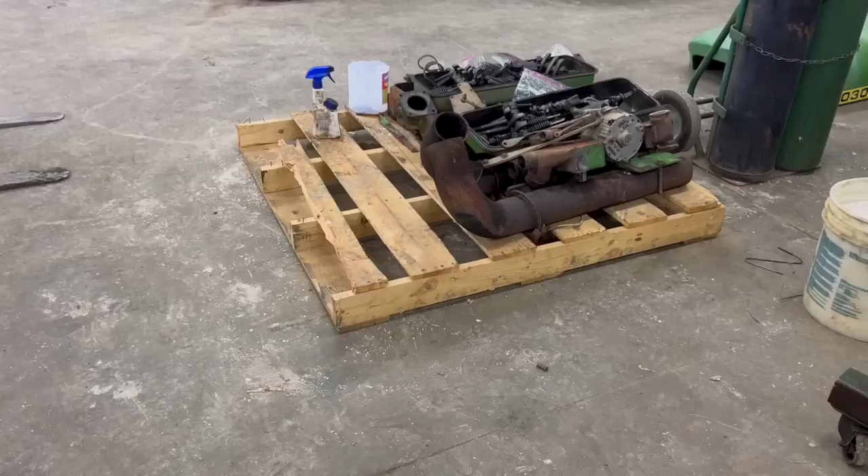It dawned on me that I drove out the driveway without kind of explaining where I was going today, which isn't a big deal, but it ties into our 5020 Detroit project. That's actually plugging away really, really well, but I also got to explain kind of what we're doing.

My friend, mechanic Larry, stopped in the other day as we were dismantling it because we had some questions on the clutch. Larry was here last summer when we rolled this project in the yard, and we all were really excited and also a little intimidated by it because it was definitely outside of our comfort zone. You literally can see the sidewall of the cylinder coming apart because of the steel delaminating. Mm-hmm.

Oh boy. Yeah. And Larry was here last week when we got everything dismantled and we got the clutch out and we were inspecting that and getting a game plan for that. But the other thing we did when we pulled the motor out, we actually pulled the hydraulic pump out, and Larry took the hydraulic pump home, and Larry's gone through a bunch of these.

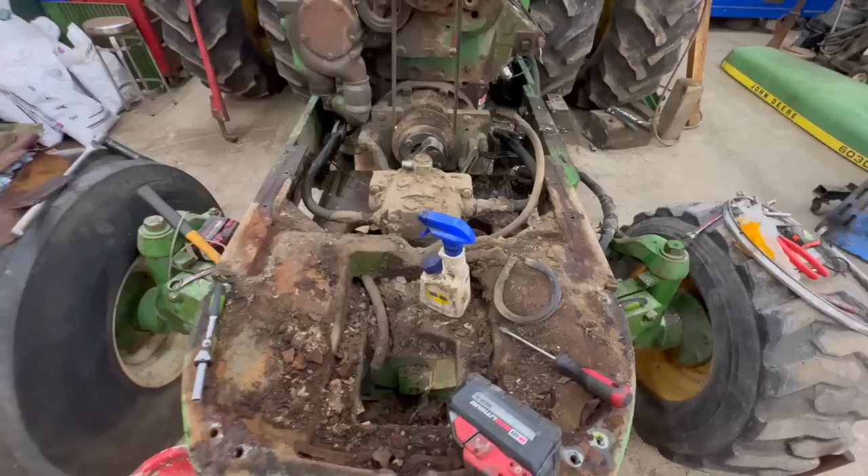And so at the tail end of last week, I actually drove over to Larry's house because I've always wanted to watch him go through one of these. I've pulled them apart, I've pulled them out of tractors, but I've never been the guy that actually puts them all back together. And my goal here was to film Larry dismantling the pump and then going back together. Well, last week we actually dismantled it.

All right, hydraulic pump is in the truck. Step one. You knew I was roping you into this project. There's no way we were doing this project without you.

Before we jump into this project, I want to just explain a few basic things. If you're a farmer and you don't pull on wrenches every day and you go talk to John Deere or a repair shop and you're like, hey, I got a manual. That's true. A lot of times what you have is the operations manual. The operation manual does the basics, tells you how to run the piece of equipment, some basic things like that. But what you don't have is what they call a tech manual. And a tech manual is going to give you the general idea of how to tear things apart and fix it and bolt it back together.

And typically, I don't know this for sure, but off the top of my head, I believe the 10, the 20, the 30, and the 40 series technical manuals was the only manual that you needed. But when you got to the 50 series and beyond, the 50 series, the 60 series, the 8000 series, then they had another manual too. You had your tech manual, but then you had the operations and tests. So the tech manual will still tell you how to put bolts in and out and what the procedure should be for that. But the operation and test is going to actually break down like what should your switches be at, etc. It's going to take it to the next step.

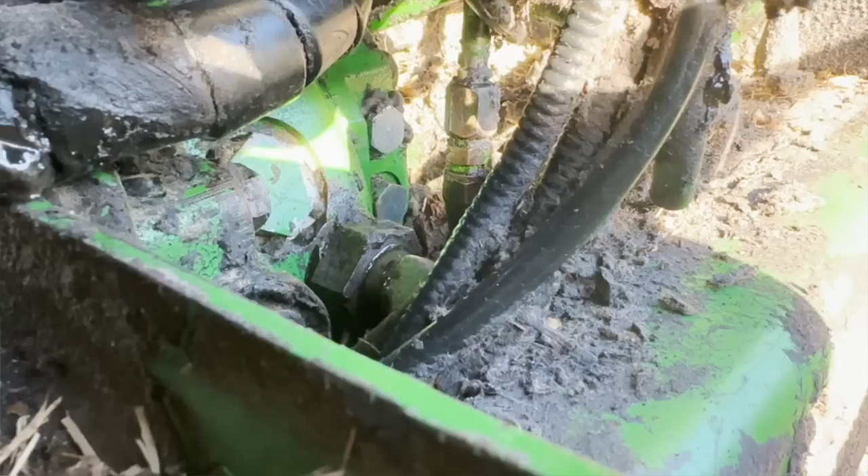Okay, so the last thing I want to talk about here real quick before we get into the video with Larry: how do you actually get access to these pumps? There's usually two different ways to get them. You either start by pulling the radiator and a whole bunch of lines and you lift them out the top, or depending on the application, you can drop them out the bottom.

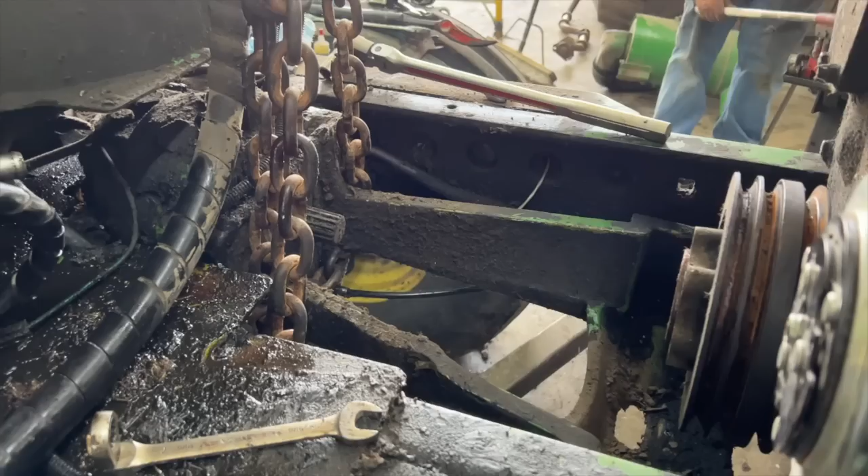Now, I've done both. I'll tell you right off the bat, your 20, 30, and 40 series, especially if it's two-wheel drive, it's not that bad just to drop them out the bottom. On the 50 series, you can do both. You can either pull them out the top or drop them out the bottom. On the 50 series two-wheel drive, it's not too bad. There's a light shield you got to pull off. Same with the 40 series, like a 4840.

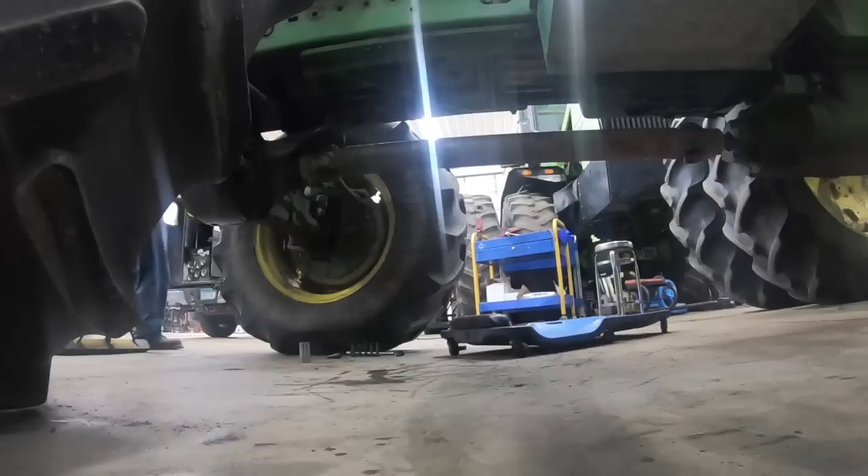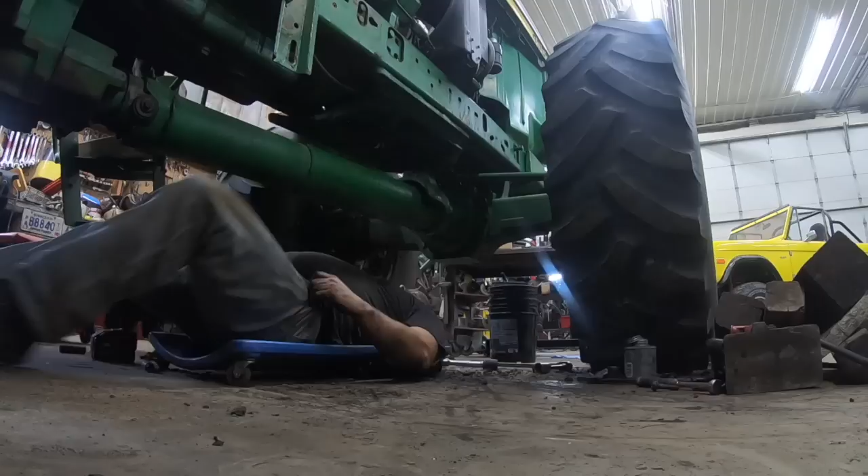On the 50 series front wheel assist, you actually have this big casting, and this big casting can be a little bit of a bear to pull off. Totally doable, but I'm going to tell you the easiest way. Usually if you get all the nuts and bolts off, you can let it rest there and then pull it down and let it rest on the drive shaft and then just transition it down to the ground. After you do that, it isn't too bad to pull the pump and the webbing out the bottom. You can do it. I've done it several times.

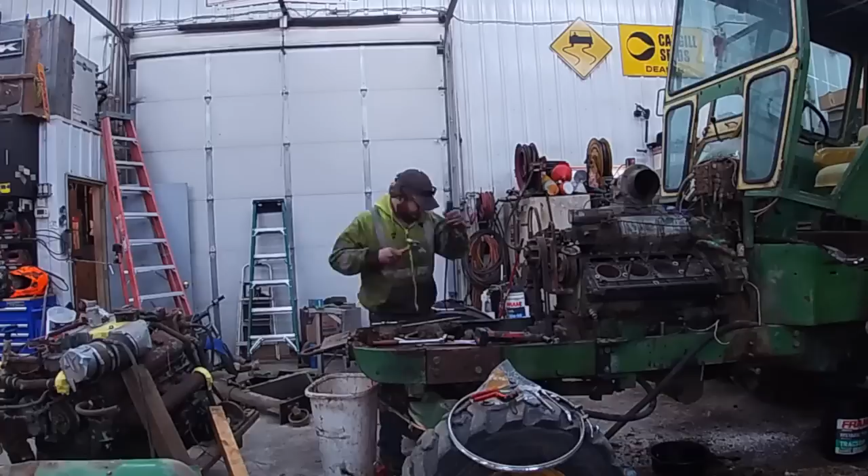I think the one time I had to do it, I actually jacked up the tractor just to give me a little more clearance between that and the front end because there's a little wear on the pins. But you kind of rotate it to like the 2 o'clock position and just drag it out. Careful, it's all heavy. That's the downside with pulling it out the bottom. If you go from the top, the trade-off is you got to get a whole bunch of lines and a whole bunch of things out of the way.

Okay, I've done both. If I have the time and I can put the piece of equipment in the shop and work on it, I kind of prefer pulling it out the top. Sometimes you just got to get low down and dirty because you're in a hurry, and you just pull it out the bottom and wing it. Sometimes doing that, you're actually going to need some specialty tools.

One of the toughest things, and this is why pulling it from the top is actually easier, if you're going to take it out the bottom is trying to get all the lines to crack loose. That's actually one of the toughest things. Get creative. Don't be afraid of building a few custom wrenches like these, because believe me, I've pulled these out in fields before, and some of these tools got built trying to stay ahead of a snowstorm. I was trying to get a 4955 back together in a cornfield in February as a snowstorm was rolling in. Hey, things you do, right?

All right, so I'm here with Mechanic Larry in his garage, of all places, but how many of these pumps do you think you've actually gone through? Oh, there's the look. Like, are you kidding me, Junior? This year? Okay, we're at the end of 2024. How many this year do you think you've gone through? Probably a dozen. Yeah. And if I've been doing this 25 years, that's a lot.

What's usually the ratio of good to bad? Is it like 1 in 10? Probably maybe 20% are not repairable, 80% usually repairable. Usually got a shaft seal leaking, and typically it's because the shaft is worn or the bearings are loose, and then the shaft is moving and it takes the front seal out.

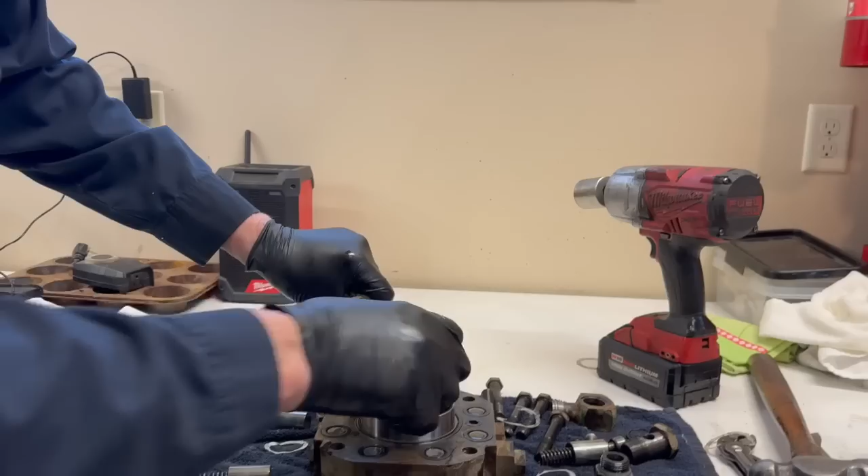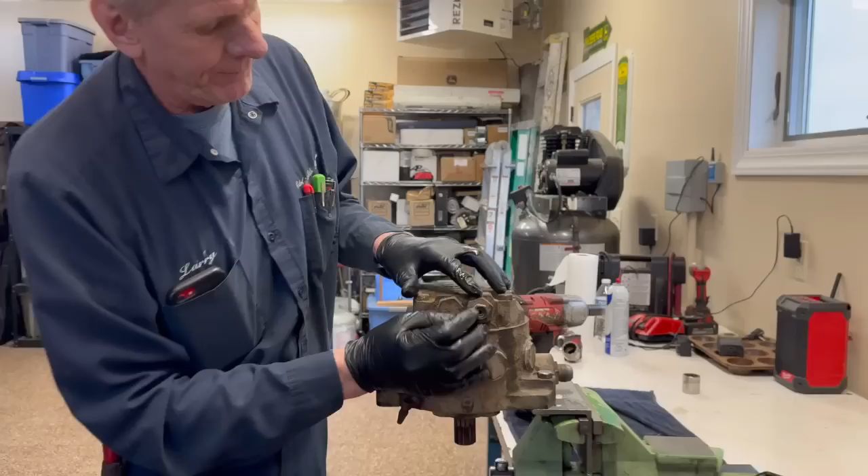This is called the head of the pump. Inside, this is where you adjust your pressure for the pump. This one has been threaded in quite a ways. Okay. Normally there's about 3 threads sticking out. If you look, there's an adjustment here; this is where you set your hydraulic pressure up and down. And typically there's 1 to 2, maybe 3 threads sticking out. This one has been threaded in quite a ways already, so we could have a pump that's got some wear.

But this is actually kind of cool because you have kind of a homemade bracket there, just a big piece of angle iron with 2 holes in it. Perfect. And it mounts up to the pump. John Deere's got a tool for it too, but this was a lot less expensive.

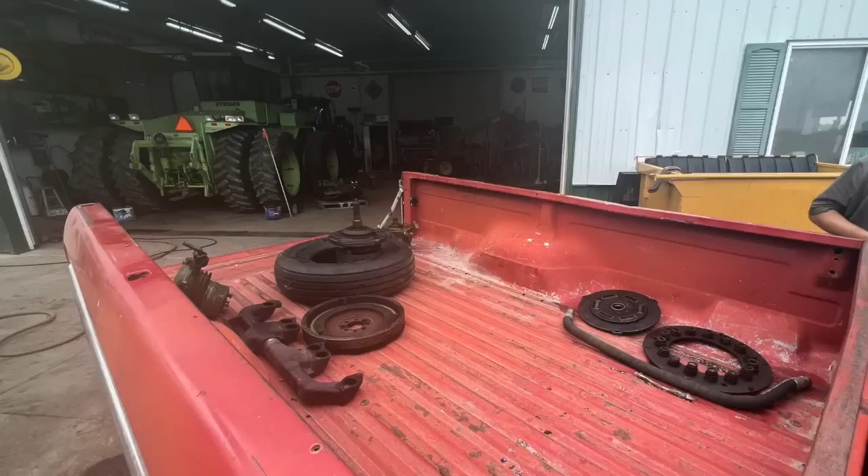All right, so right off the bat, you know the pump's been sitting for a decade plus. What do you think it's gonna look like inside? I think it's gonna look good because I'm looking at the oil as it's coming out. It's old and stinky, but it's not rusty. So okay, I think it'll be all right. So we'll pull her down and see how bad it is. You know I've been the guy over the years that's brought you several hydraulic pumps and you get into them and you're like, no.

New pump. Okay, so this is off a John Deere 20 series. A lot of the other stuff I brought you in the past was always 40 and 50, 55, 60 series, power shift stuff. If the tractor is not power shift, do the hydraulic pumps typically look like they're in a little better shape, or does any of that seem to matter? It doesn't really seem to matter. Okay. It depends how much debris has gone through the pump. Gotcha. That's what's gonna take these out.

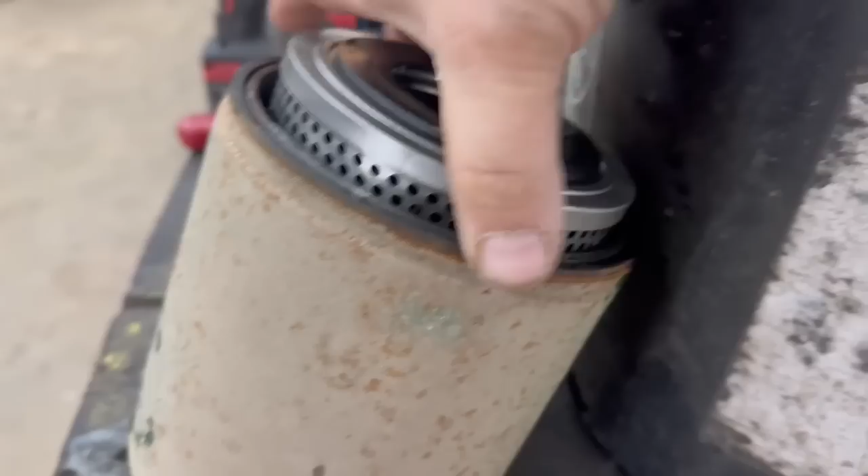One of the things that you want to do is, a lot of guys will mark 1, 2, 3, 4, 5, 6, 7, 8. I've got a system where I just lay everything out and I know which way I put them in. So 1, 2, I'll mark them here versus physically marking them on the pump body. This is called the head of the pump. This has got the stroke control valve screen on this side for the filter screen. Stroke control valve tells the pump when to turn on, when to turn off.

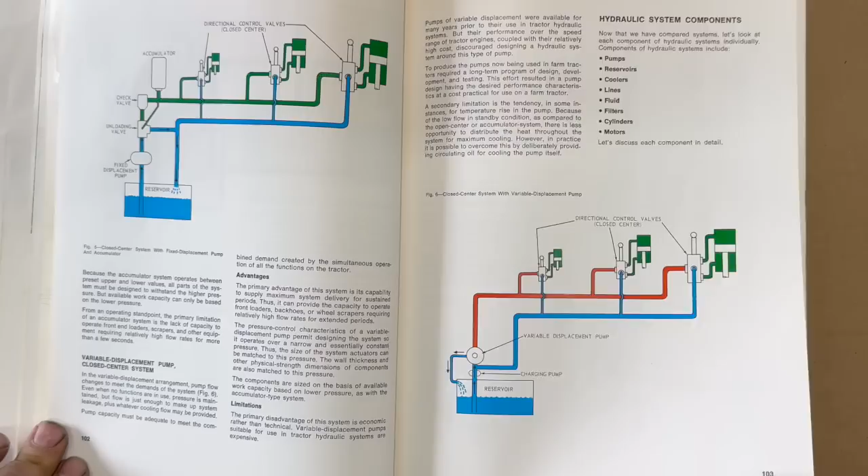When there's a demand for oil, it puts the pump into stroke. On this pump typically, as the shaft is turning, all 8 pistons are in the out position. When it's building 2,500 PSI or 2,300, all those pistons are out, so the pump shaft is just spinning. Once there's a demand for oil, the pressure drops, the pistons come back against the cam race here, and it starts to pump again. Right now, with no pressure, all 8 pistons, it's like a camshaft. It's moving each piston in and out.

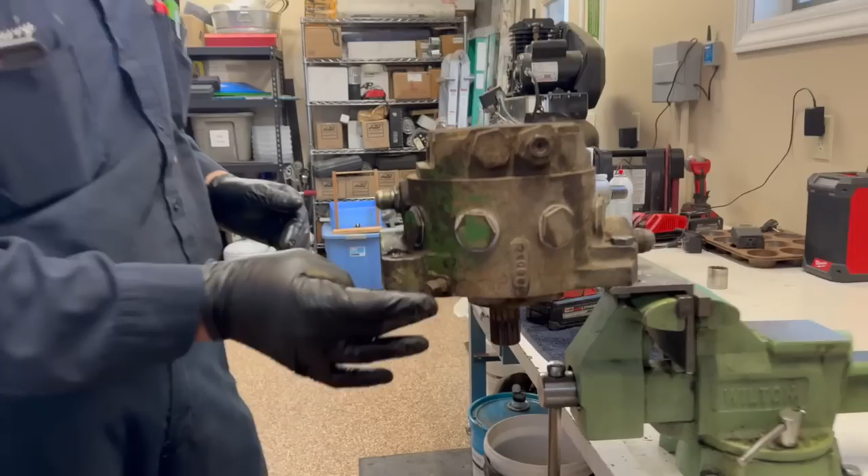Can I ask one more question? Uh-huh. Why did John Deere put that little line on the bottom of the pump? Seal drain line? What's it called? Seal drain line. I don't know why they put it at the bottom. You do have to replace that, obviously. Yeah, it was junk. I just know from many years of putting these in, that's the line everyone always has choice words over, isn't it? Yep. I don't know where else they could have put it. Okay. Now, the early 10 series didn't have this line on it. Gotcha. But you could add it.

And when you did that, you had to drill a hole into the head of the pump, into the nose of the pump. Okay. And then you would run a line right between here with a steel pipe, a piece of pipe fitting basically. And then you'd run one of these lines all the way to the back. So why they put it on the very top, or on the bottom, I don't know where else they put it, because that port goes all the way. Once we get it apart too, you'll be able to see that port, how it comes out of it. And most people don't put 10 of them on. No.

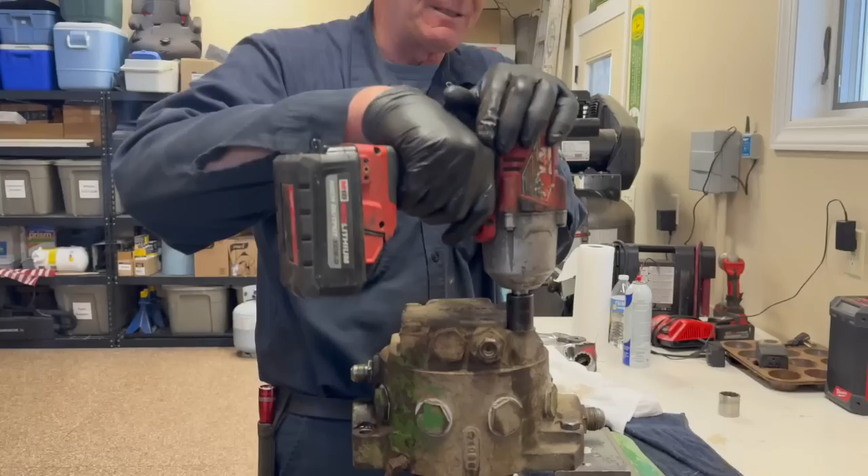So, we're ready to start. Coming apart is easy because there's no torquing. So the Milwaukee is, this is the easy part. Going back together, everything's got to get torqued, so you can't just zip them on. Okay.

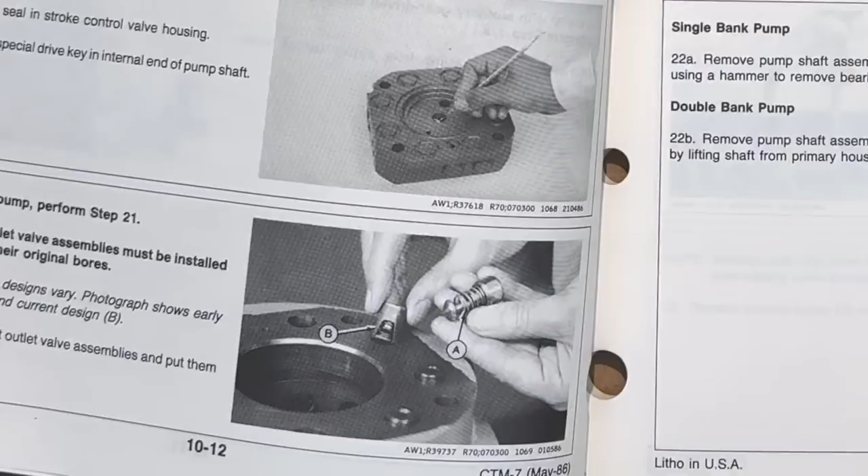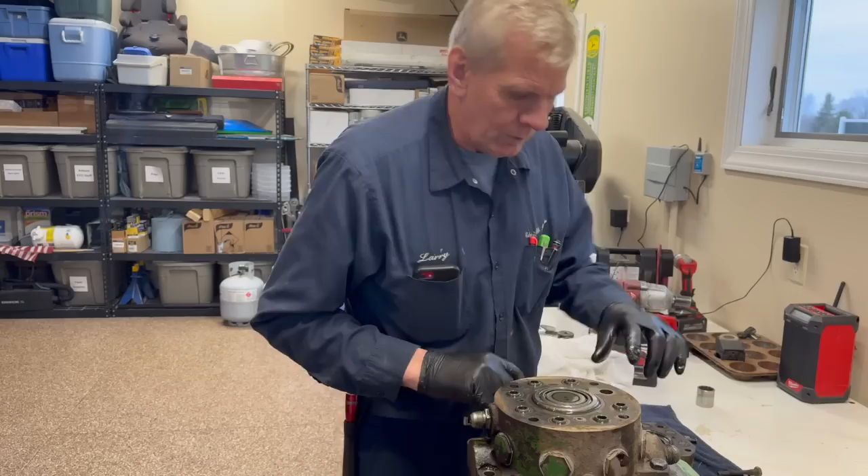To shim up the pump shaft. Now these, this is the early style. Later style this was all one piece. So these, when you put them back in, you have to peen them over a little bit. So this pump has probably not been apart before. What do you mean peen them over a little bit? You take a little ball peen hammer and you hold this down and then just tap it, just a little tap right here so it can't fall out of there.

Okay. Because these springs feel like they're loose, because normally when you take the head of the pump off, normally they come out and that's why you've got to peen them. This one, for some reason, they're not popping out all the way, which they normally do. Get all 8 of them, and there again, we're putting them all in order, so when it goes back together, it all goes back together in the same holes. And there's 8 of those? 8 of these, 1 for each piston, yep.

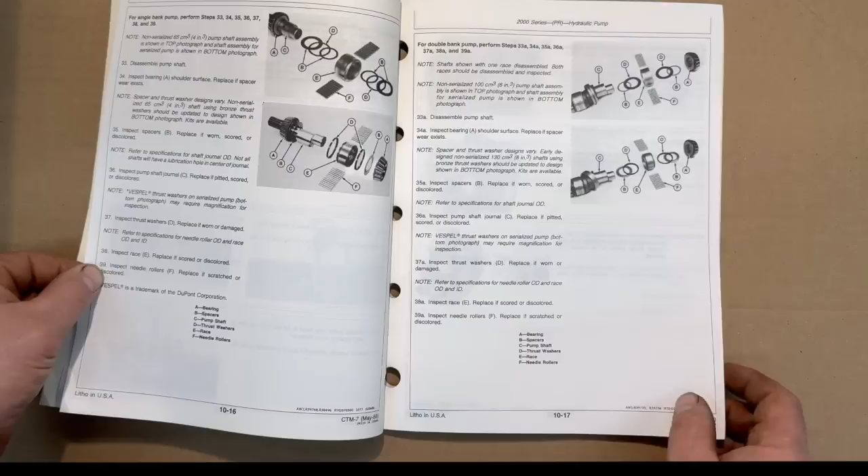So when you actually pull them out, there's a seat. It's like an engine valve seat. Okay. And then it goes into a seat inside the pump, down in there. Okay. And the spring locks it into place. Now we might be replacing these springs, Eric, because I recall every one of these, because the 10 series had the same pump, they'd pop out of there all the way.

So. Think that could be just from sitting? Shouldn't be. There's a spec in the book. I can check what the free length of these is supposed to be. I've got a feeling that's probably inexpensive. No, they're not going to do that.

Piston number 1. Watching the oil go in the pan, I was like, yes, I'm not responsible for dripping oil on your garage floor yet. About a year and a half ago, I think it was parts for Puff, I brought him here and didn't realize that he dripped a trail of oil from the middle of his driveway into his garage. Now, Larry's very mellow and very easy to get along with. That still doesn't mean he wants hydraulic oil dripped on his driveway. So we did our best to clean it up that night.

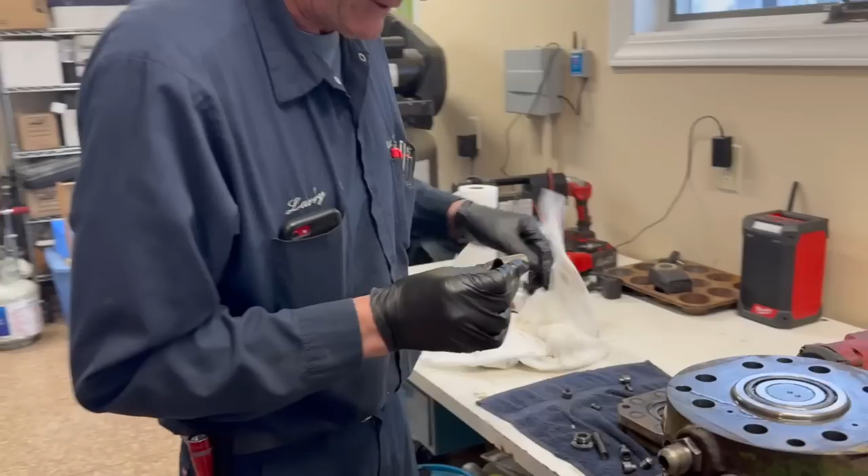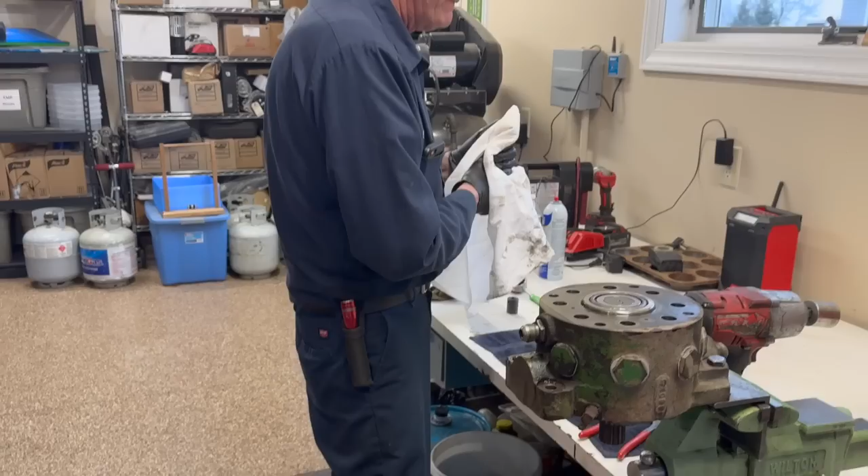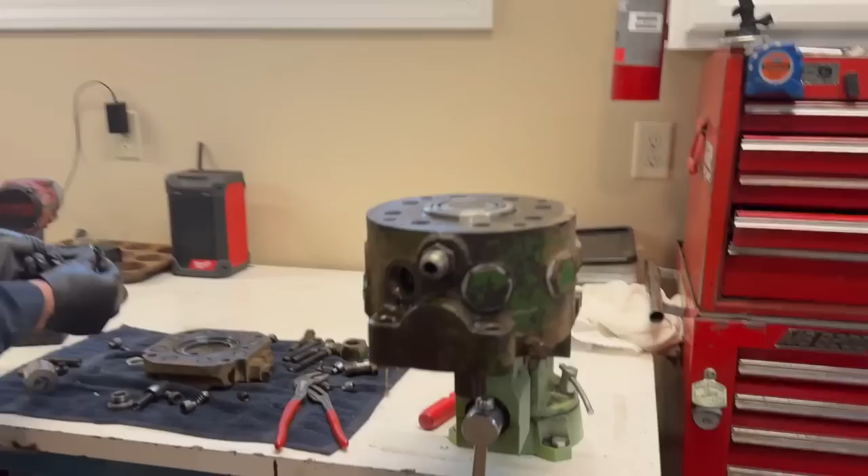Now this is, if you were to have wear on the pump, this is where it would be. You'd have scuffing and scoring. Okay, and that's actually looking pretty decent. Very nice. You don't have one laying around here that's smoked, do you? Just to show, when it's this bad, replace it. No, I don't have one of them around. Will it be pretty visible? Like you're not questioning if it's bad or not? No, there's no question once you see that. And that's these caps here? Yep. And if one is good, typically they're all good because they're all operating the same amount.

So now this is just repetition. You just gotta do it 8 times. Want some help? Well, it never goes smoothly when people are filming it. It doesn't. You just go right up against the head of the bolt and it stays there. Okay. So now, this is looking better than other stuff I brought you. So far so good.

And you're just tapping on the end of the shaft there? Yeah, and it's supposed to fall right out at this point.

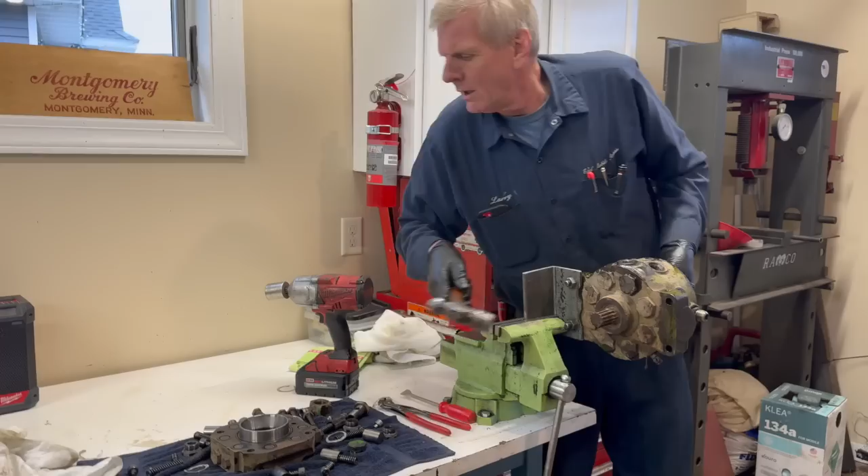All the pistons come out, don't they? You got 8 there?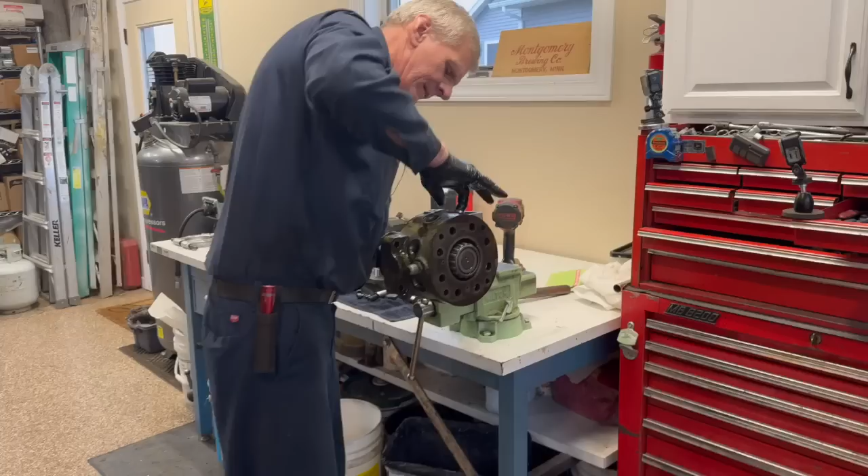Well, good to see you're not perfect either. Now it should fall right out of there.

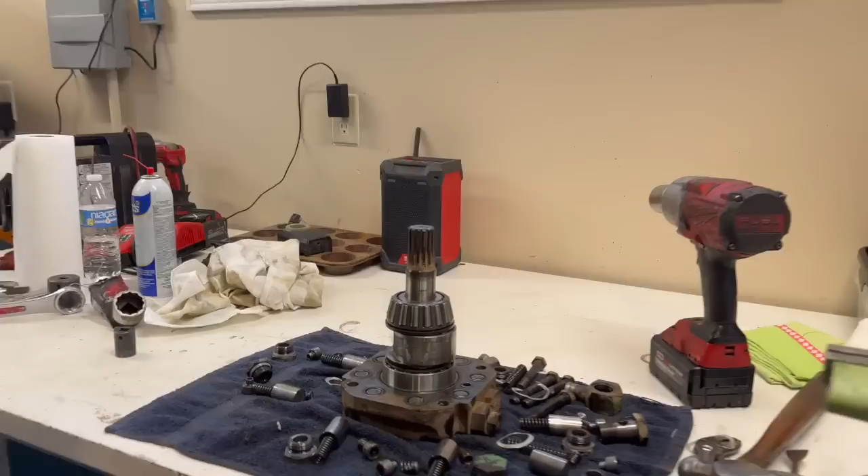So it's basically like a little camshaft. Just like a camshaft. So as that's spinning, this piston's going in and out in that inner cavity, and that's what's pushing oil. Yep, that's a pump seal, just like that.

So now you can see on here, we have a little bit - oh okay, that was this oil. Okay, a little bit of a wear pattern, but not like a lip. You can't really physically feel anything. Let's see what this O-ring here is.

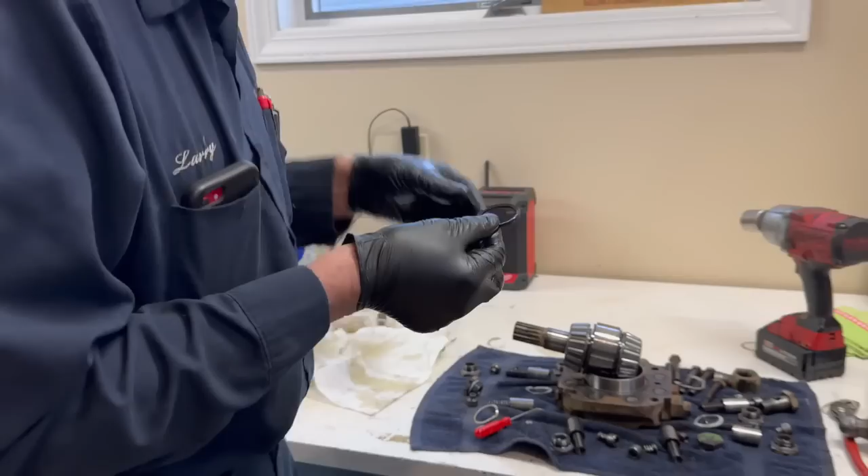This is the one that's always bad. So you had the plastic seal pack and then the O-ring? Yeah, it goes on like this, and if you look, this is the one that will leak in short order. So when you do have it leaking out the tractor, that's usually the one that's gone.

Because this seal is the outer seal here, this lip seal is mainly a dust seal. It's not the pressure seal - this one and this one are on the shaft like so, and they sit right there.

Now, the million dollar question: can you put those two in with it in the tractor? Absolutely not. Nope. So no matter what - and usually if those are bad, you probably got something else going on. I've had guys put just the outer seal in thinking that would work. No - it's getting so much, because once this packing is really worn, if you look at it, look at this side, what it looks like.

Now I'll give it 180 and see what that looks like. How it's got - it looks like the quad ring out of an SCV. Yep, it's a specific quad ring, and there's no quad ring left here. So it's worn out.

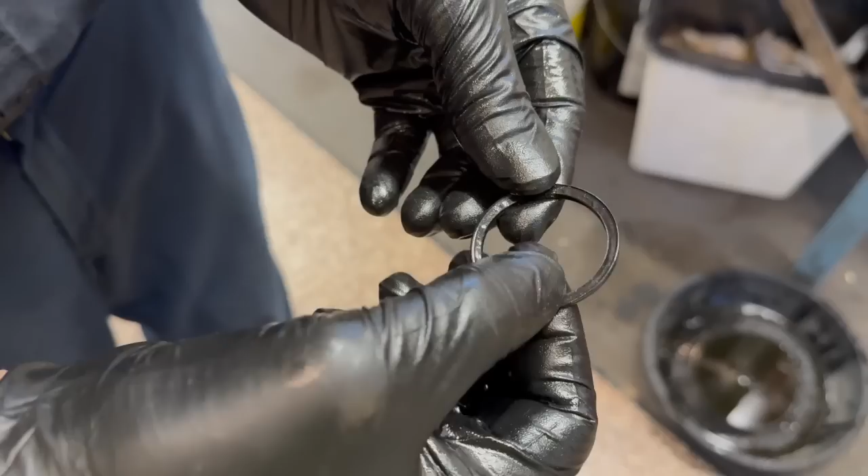Yeah, this is worn. Oh okay, I got you, so it's worn that much. Yeah, there's that - if you look at the thickness of the outside and the thickness of the inside, you know there's that much gone off of it.

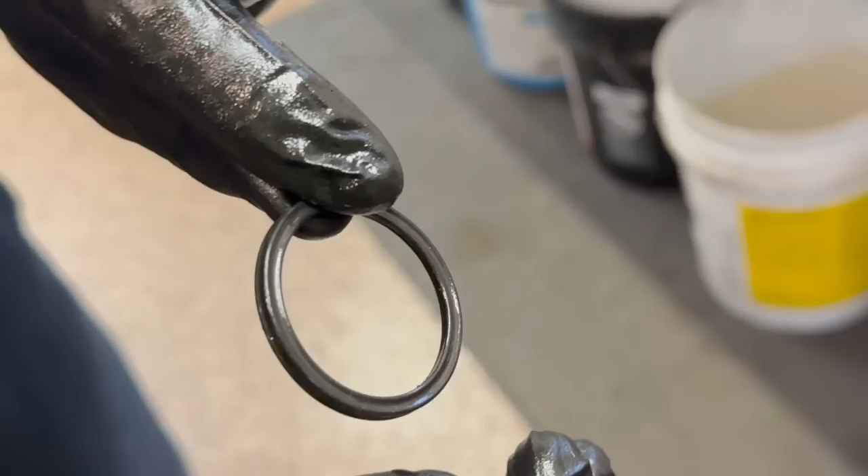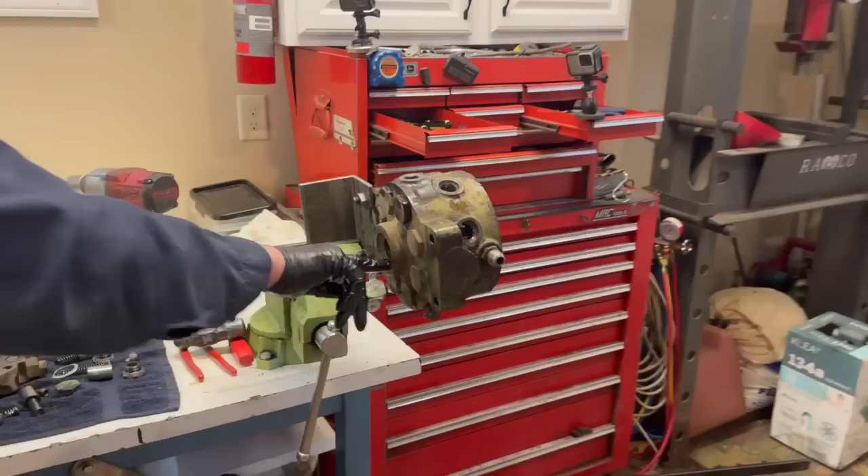No, you can kind of see it, but that's why you can't put them in the machine - you can't put it in. There's a lip seal in here yet, and that'll take out later. There's a snap ring that retains that in place.

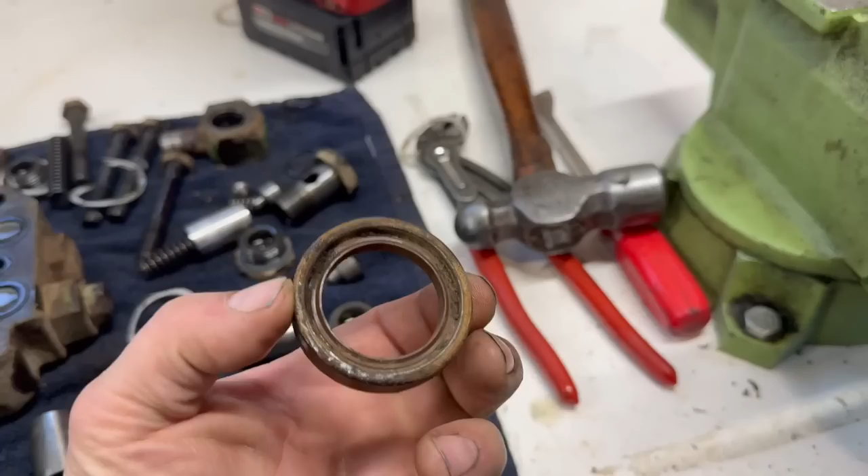And that's all there is for the pump. Get these out yet - behind that is your inlet valves.

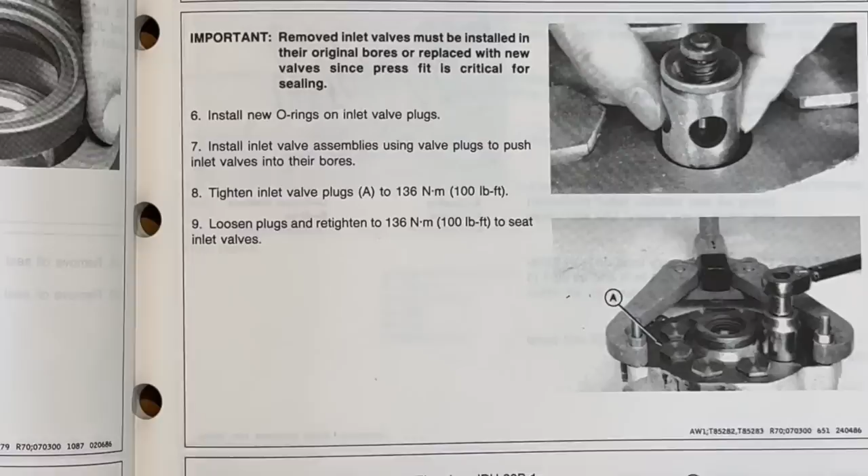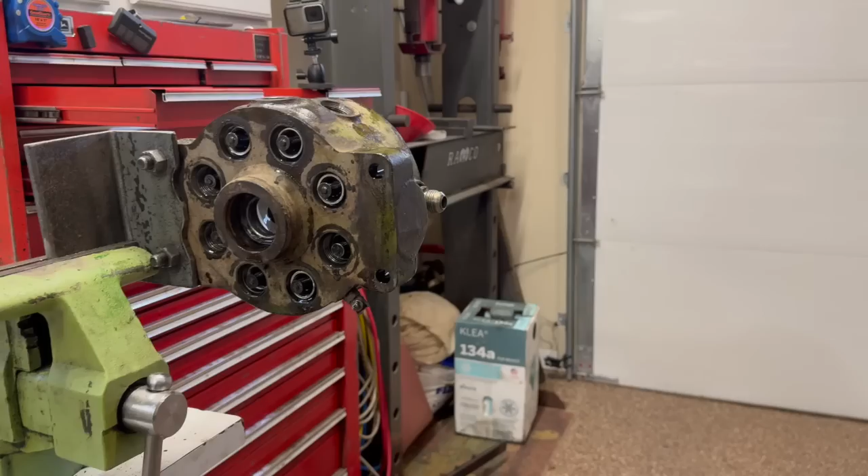You do have a little problem with these. Okay, I'll bite, what's the problem? Just a second, I'll show you in a second. Is this the type of problem that costs money? Yeah. Oh, I knew I wasn't getting out of this unscathed.

These are supposed to be pressed into the housing. And they're all loose? Very loose. So you're about to tell me she's junk, isn't she? When the housing's worn that bad, sometimes you can peen them with the center punch.

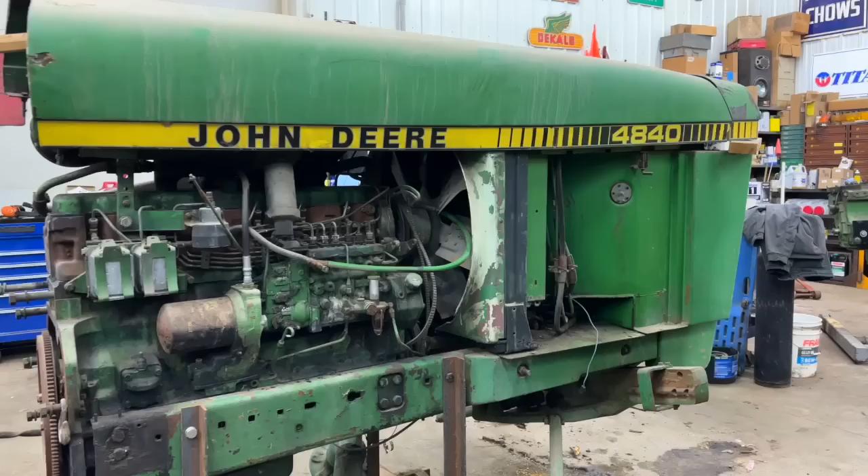These are gone too far. Oh wow, the bottom is actually eaten. They've been hammering in there.

It's just about eaten through. Yep, there's kind of that lip, and it's actually eaten into that lip. Oh man, you know how other people have that luck - like, oh, we just threw batteries in and it fires up. I don't think I have that luck.

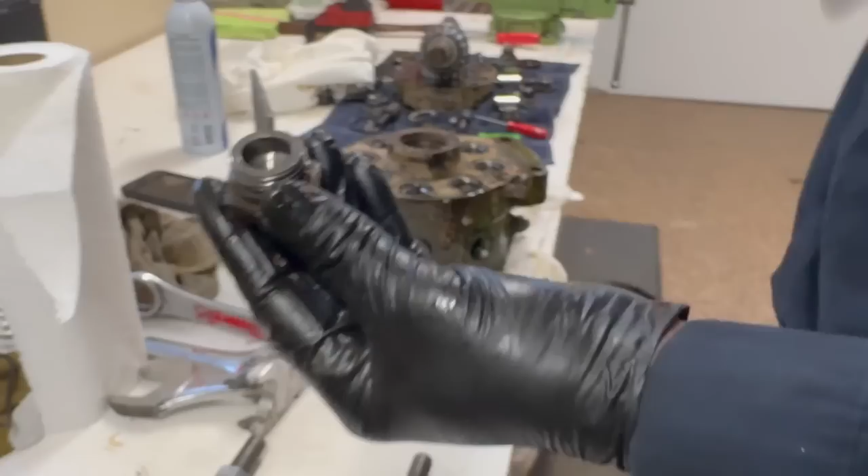Because typically when you thread this - oh yeah, you can see, look at the heads, they've been hammering against here, and that's what that little lip right there is. Those valves have been doing this in there. Because typically when you thread this down, that holds right up against that, but these have been bouncing so long that it's eaten into the housing there and it's eaten into here.

Well, can I give you some good news? That's not going to matter - there's hoses ran up to both ends, so we could make whatever, we can make anything work. All right, so it's just basically scrap iron?

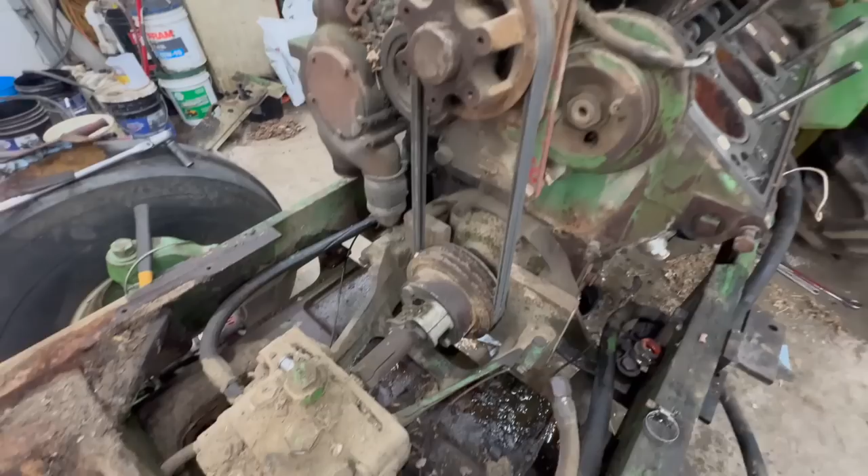Yeah, because there's no way I can get those to retain, and they're so deep. Even if I could get them to retain in there, they're going to just pop out. There's not enough material left to hold them from bouncing around in there.

Well, let me bring you what I got. We'll see if any of it's salvageable, see if we can make something work there. Shoot, because the shaft actually, that could have been cleaned up and reused.

I can't tell what these feel like. I can press this off and then we can see. The other reason I've had to replace shafts, behind this bearing race is 36 needle bearings. And if the shaft itself is worn, you got to replace the shaft.

I wouldn't replace the shaft because of this, but if that was worn, I would have to. So possibly we have a salvageable part. A part, yeah. How you know, we'll press that off. We just found the bad news, right? It's not salvageable. Okay.

Well, can't quit the day job. I don't know what the day job is anymore, but can't quit it. The downside of when you get into these projects is some days there's a joke about the checkbook not being deep enough. Yes. But we'll see what we got.

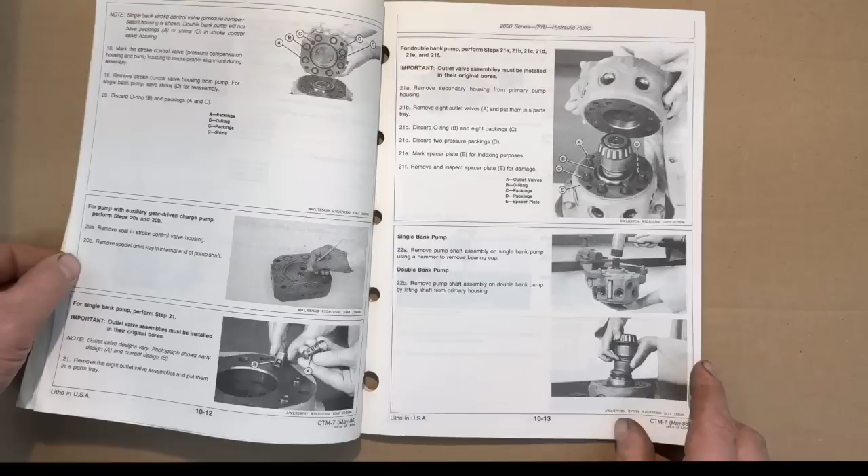The good news is, I don't need this to be practical. This is just a fixer-upper. This is a toy. This is gonna be a glorified car that if we can put in a field, we will call it an accomplishment. Call it a win? Yeah.

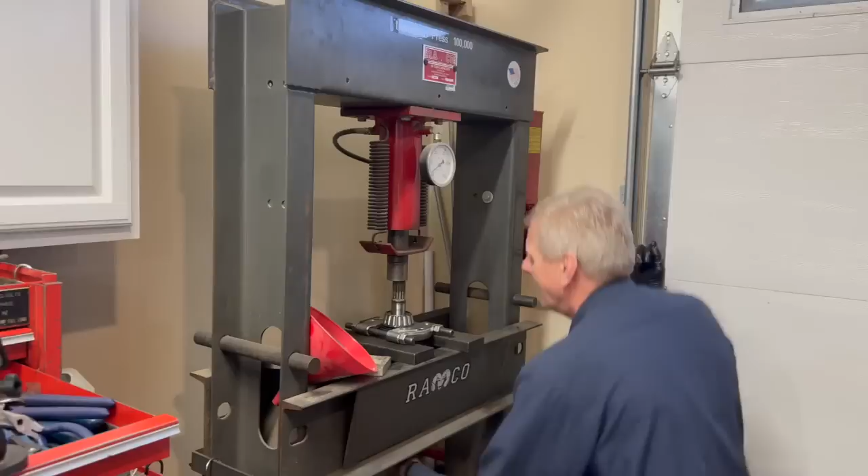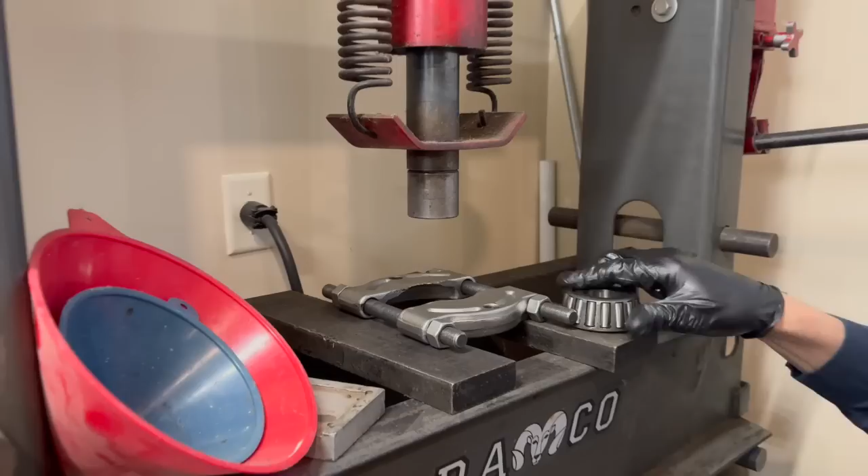Not everything comes apart like that, that's for sure. Okay, now we'll see what the... Push one pile out of the way.

Okay, so this is where the 36 needle bearings come into? Needle bearings, you see right there? Yep.

Go inside of that race, and typically this is where you'll have the wear, on the uphill when this is operating. This part of the shaft looks really good, really good.

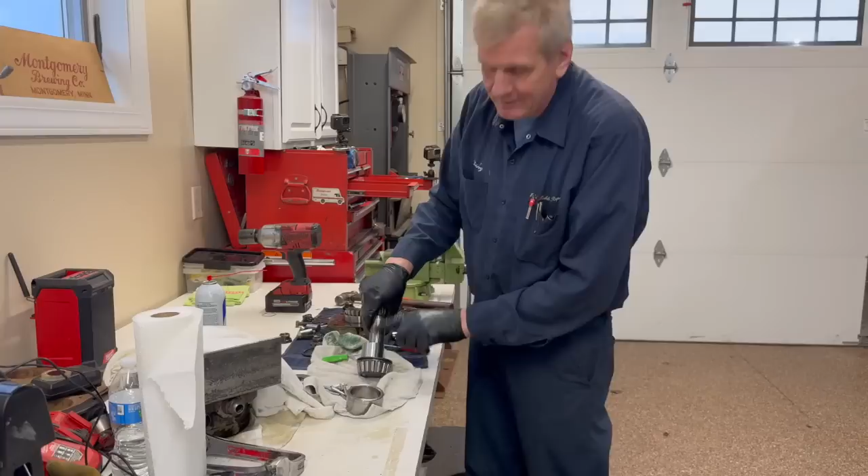So 20 series or 30 series, 4430s, 4630s, 40 series already went to the newer style. And what they do, just make things beefier? No, they actually changed, rather than having this and this against the race, they put a small thin washer and it's a different setup completely.

This is a little different because we only use 25 needle bearings. They're larger diameter needle bearings on a 40 and 50 series and newer. So this is different, these are different. The shaft is different. That stinks.

This I thought, well, main hydraulic pump, that's an easy one. I didn't expect those. Any idea what would have caused those to chatter like that? Just luck? Many hours of use, vibration, sure. Maybe, would this engine vibrate more than it will? Yeah, probably. I think that's pretty safe to say.

But even that, because this is, you know, I don't know if vibration could have done it. I think it's just use and years. And once they come loose, then every revolution they're doing this. Sure, they just heighten it. They're popping in and out there because it's trying to suck in oil every time.

I love talking to you, but these conversations get expensive sometimes. Oh, we'll figure it out, we always do. There's a reason I live in mom and dad's basement. You want me to pull the head apart while you're here too? Yeah, might as well, make it fun.

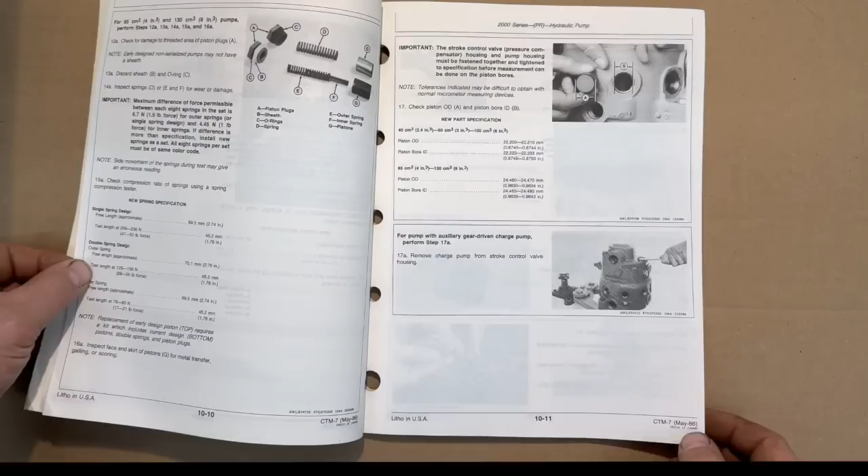You can actually see the stroke control valve from here. Okay, do you remember me talking about destroking screws?

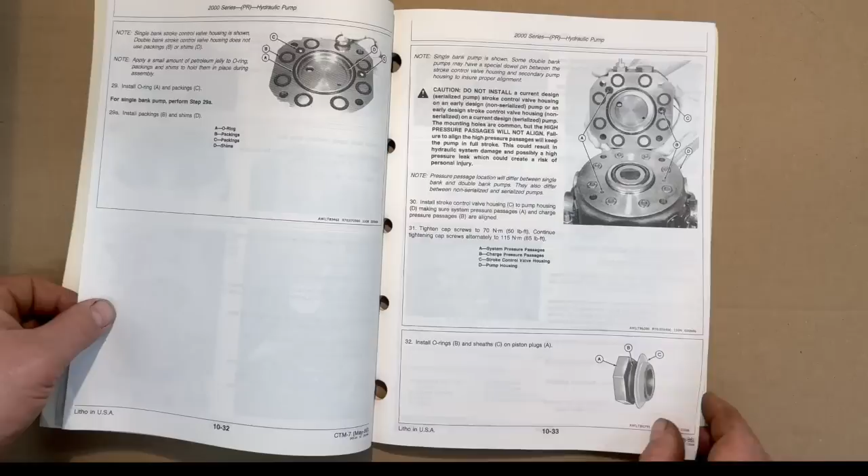That right there explains why that thing was turned in so much, doesn't it? Uh-huh, yes.

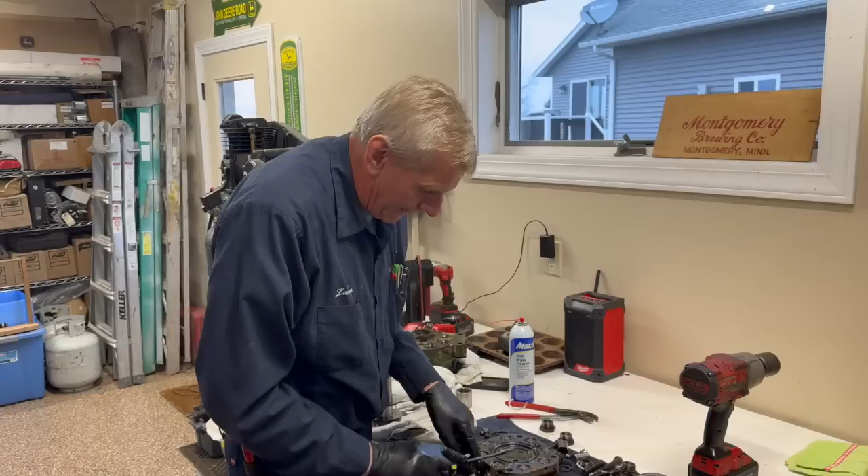Okay, in the hydraulic head of the pump here, you've got your stroke control valve right here below. And then there's a set screw that we looked at earlier, that's what sets your pressure. And as you push that set screw in further, it pushes this sleeve right here, it puts more pressure on the spring for that sleeve to push against the stroke control valve.

So I'm gonna take, and I can actually, oh sure, you can pry it up. But we got so much spring pressure against it because our pump was worn, I'm assuming. That's why there's so much spring pressure against it. So we'll pop that out of there.

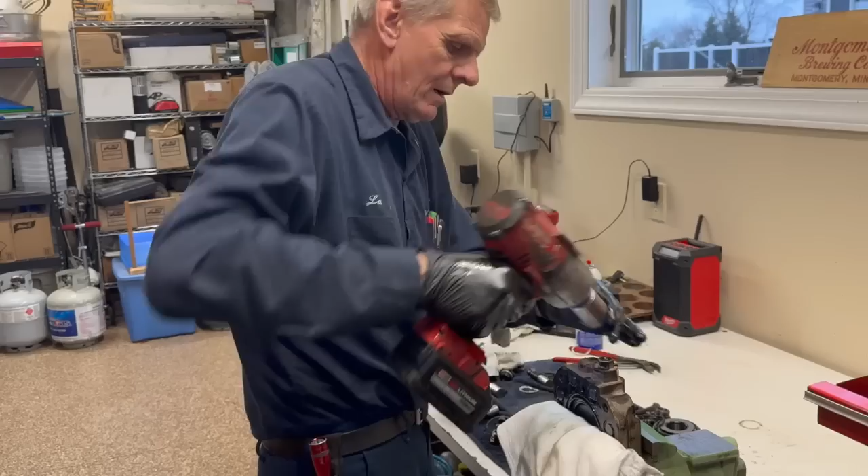This is the big spring that this adjusting screw pushes pressure against, put pressure against this spool to go against stroke control valve.

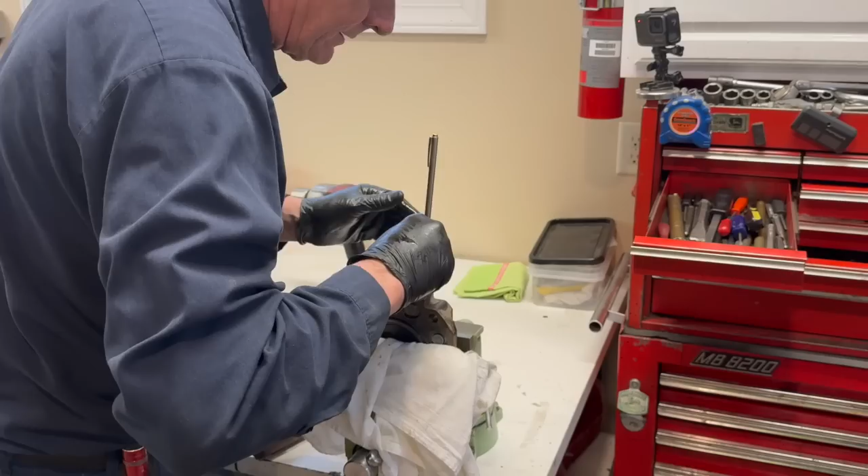So now I can reach in with my little magnet and pull the valve if it's not stuck, which it is. Okay, so we'll take it out the other side. Take this one out.

What causes them to stick? Usually it's because of metal in them, but this one I don't think it's metal. It just could be just stuck from sitting.

Oh, this will tell another story for us. Yeah, we like stories. You didn't find any gold, did you? Oh, dang, no. Boy, that's clean.

I've seen these things plugged. Is this a screen? And I've seen that screen plugged solid. So hopefully that means the rear end isn't half shot or 100% shot. Nothing, there's nothing at all on that. It means we're not splitting a 50-20. No. All right, well, we're having a little bit of luck.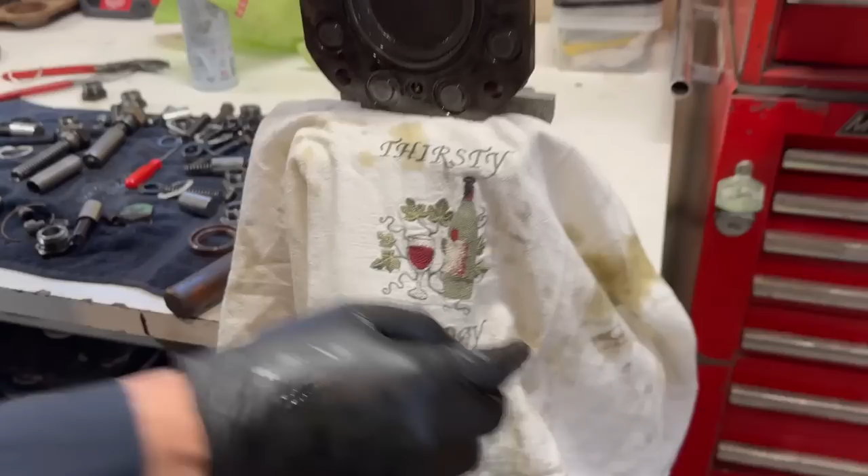So now you just flipped it upside down. I got to take the other side out. Now this is where that manual destroking screw would go in.

Which, if we were putting this one back in, it would be getting a manual destroking screw. Now we can push, there it went out, the stroke control valve.

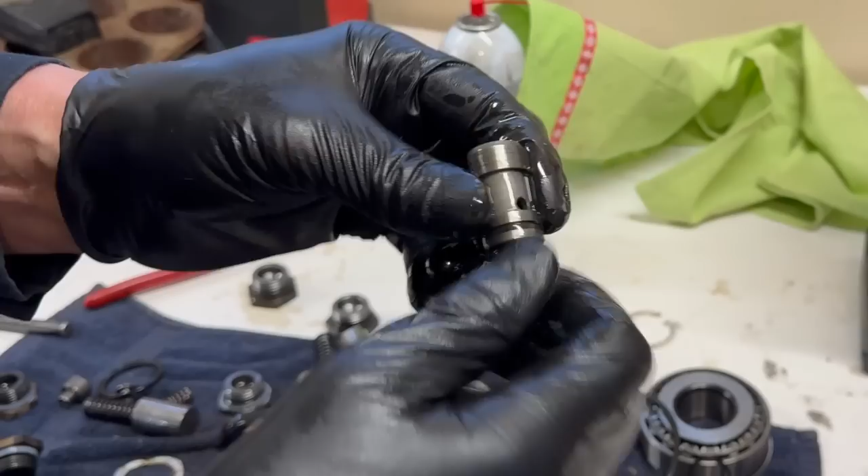So that's what just came out the bottom end, and this is sticky. It's the original one because it doesn't have the backup ring, but it should fall out of there, and it doesn't. This one has got it's sticky, so it wouldn't have worked anyway.

When you mean went to work, what, we went to build pressure? No, because when this valve sticks, you'd have had to come in with that roll pin and push the valve off its seat, because this would be trying to push it onto its seat, and then hydraulic pressure has to bring it off of its seat. And it wouldn't have been enough, because all you're relying on is the 2 ports here to get oil pressure into it. So that wouldn't have worked anyway.

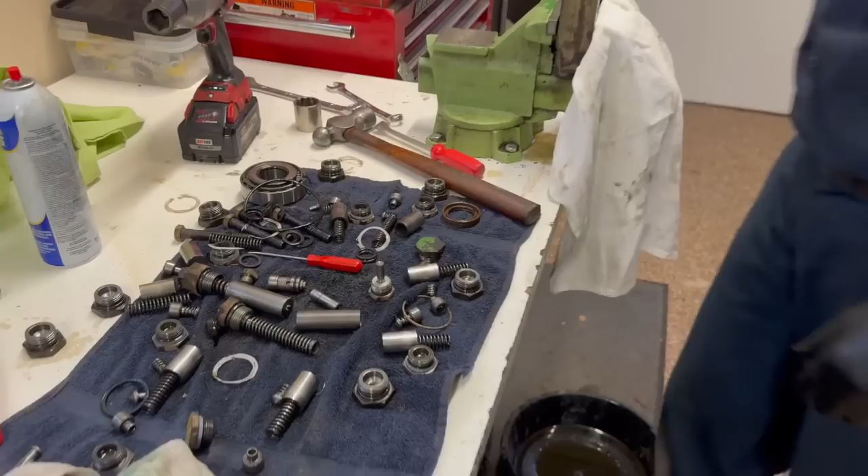Now, another spool here, and that's it. Head is empty. I've been told that before. Pump is all apart. We have a pump body that's not usable.

Is there anything salvageable here? I mean, basically that cam, but it's only salvageable for 20 series, early 30 series. Okay, like the head, I mean, there's really nothing, I've never replaced, all the years I've never had to replace a head of a pump.

Can you get the pump body that's bad? Yeah. Have you ever priced them out? Can you still get that from Deere? Well, let's check that out.

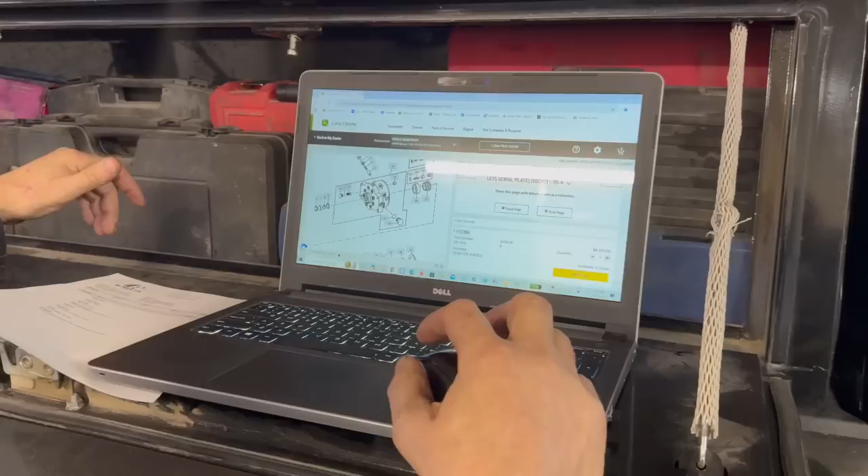Number 16, I think, is going to sub to an AR94661. Okay, sub AR94660. AR94660 is a complete main hydraulic pump. Okay, so they don't even part it out, they just, you just get a complete one. Yep, that's marked R34, it doesn't matter what it's marked, but it's subbed AR94660.

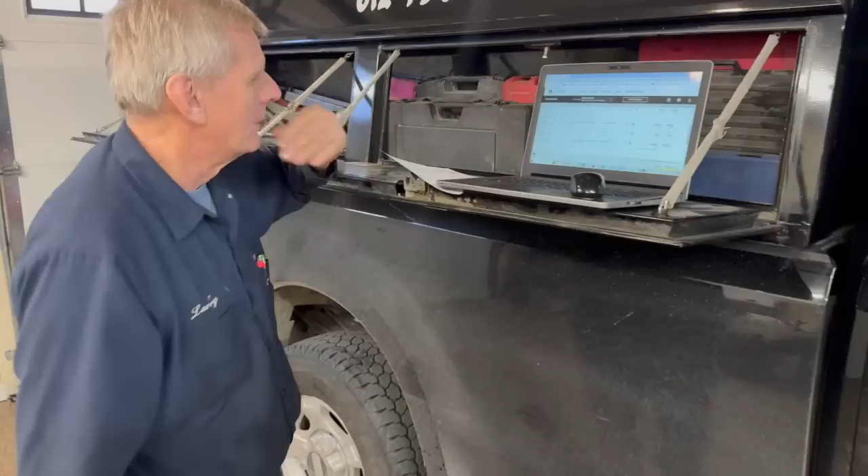Sure, from Deere, does it show price? I'm gonna see. 4115.85 with core 3865.85. From A&I, 1327.51, that's an aftermarket main hydraulic pump.

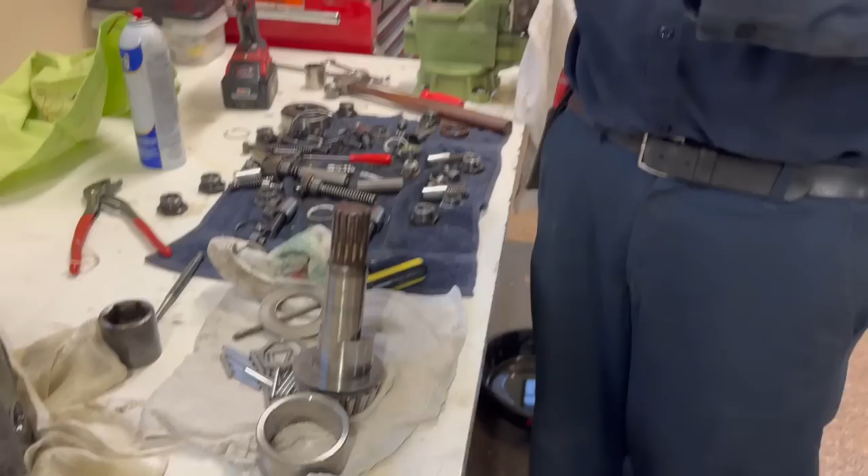AR94660 and an AR94661, there's the 2 different part numbers on the pump, and the 661 I think, I'd have to look, but I think that's the 4020 number, and the 660 is this one. So the only way they change that is they change the lobe on this, like a camshaft, like if you're running a racing cam, you change the lobe and the duration. And this one it's a little bit below flush. A 4020 shaft, that's not below flush, it sticks out this way a little bit. Okay, the machining, so it doesn't have as much throw, so it doesn't pump as much. Okay, usually they have a part number on the tip of this shaft.

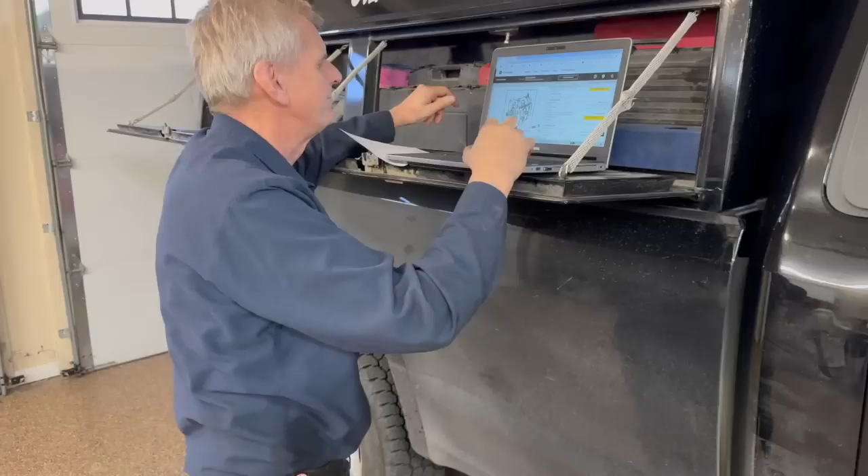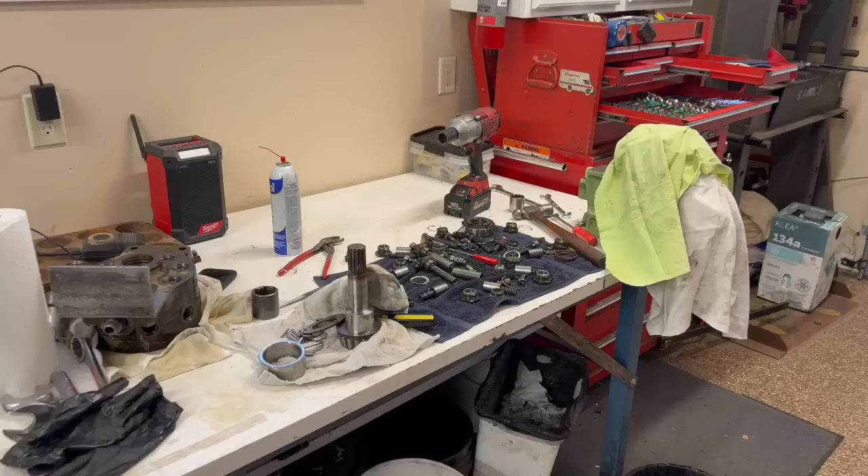I don't know how they did it anyway, but if you've got front wheel assist, then it went to the bigger pump. Well, I know this one was 2-wheel drive because we pulled the spindles out of her. Yep. And the 661 was only with the front wheel assist. So, do you want me to just leave this here? If we'd have to get one from Buck or whatever, it has to be assembled anyway, so it's going to take 10 minutes. Put it back together. Okay, I'll press everything back together.

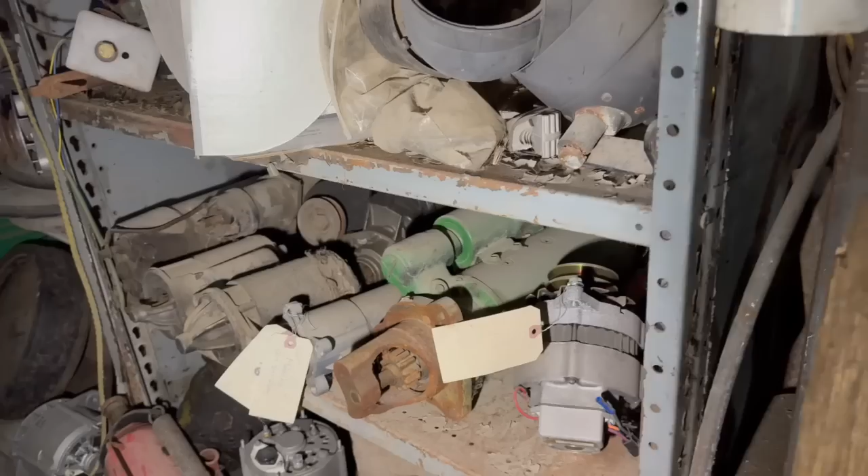The one in Wisconsin is literally still hanging in the cradle, and that'd be pretty easy just to grab. I have something laying underneath a shelf. I had a bad one off the 50 series. A couple of years ago, we had one that was shelled out. I think all those ended up going back as cores. Okay. I guess the thing would be to do the least amount of adapting if we can figure out what size inlet and outlet are on them.

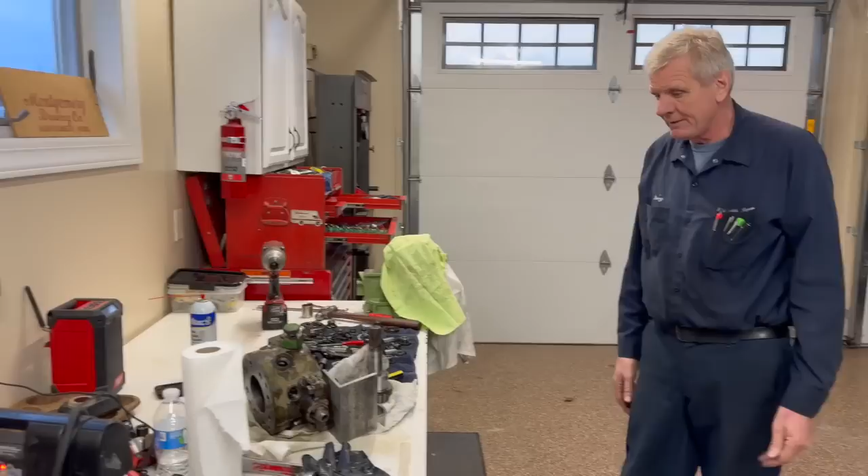Yeah, and where the outlet is. They did change, but that's our blank slate though. I got to get hoses made up. I think we can pretty much make anything work because we're not reusing those hoses. 40 series is going to be 1.25 inches. Yeah, it's 1.25 inches and 1 inch. That should be the same on a 40 series. And again, all of that's blank slate.

Like I said, ideally, suction's not the big one, but the high pressure, do the 90 or 45 out the sides with metal. They 90 degreed the hose. You weren't expecting that, were you? Yeah, so they literally just had... Oh. But you got to remember, 20 series, the only thing the hydraulics are running is power steering and the SCVs. It's not like a power shift. And so that's kind of why I was hoping this pump would be in better shape.

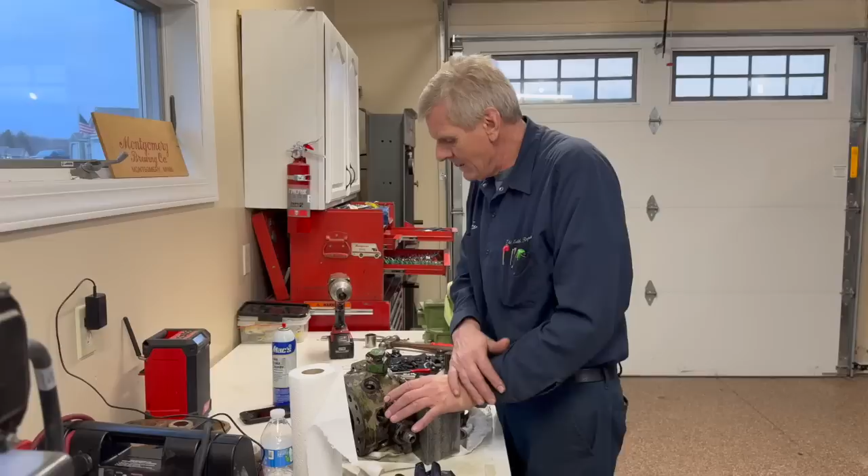But you can put on like a 4430. That's exactly what I was going to ask you. There's a 45 that comes out. Yep. And actually I think the 40 series stretches that fitting out. And I think I still got a 40 series line from Puff. Well, you're going to have a fitting on that pump. Yep. And if that's the extended fitting, that's going to come out and down. See? That's exactly what you need. Well, look at that.

We're fixing more problems than we got. We're trying to get a motor out of a bus in a tractor that hasn't ran in 15 years. We're gonna hold off on that "solving more problems than we got" comment. We're just gonna say we're taking it step by step.

Fine. We should be able to use that fitting off the tractor. The problem is we can't run the steel line down the side of the frame because the oil filter's in the wrong place, so you gotta run hoses. Or we might be able to tweak it. I don't know, we'll see. But now that we're gonna be using the 4840 pump, I will see if we got a steel line.

Earlier today, me and the mechanic Larry found out our piston pump is junk, our hydraulic pump is junk. So Adam is actually running over another one that we had here to see if it's salvageable.

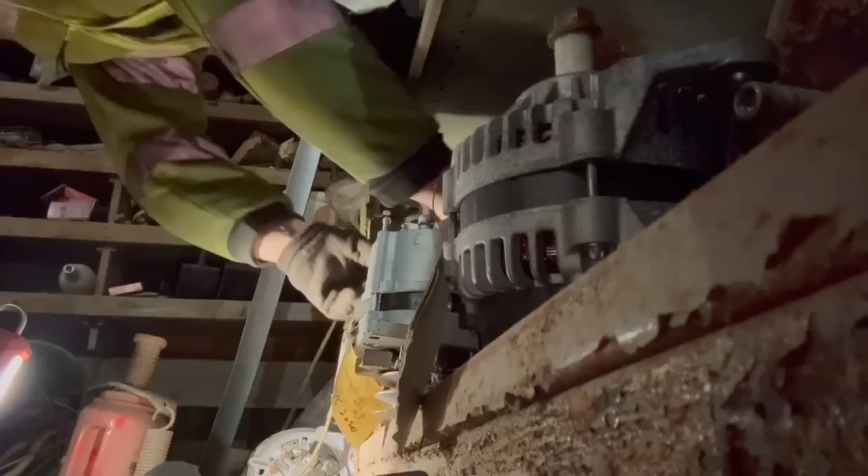The funny thing about this, Larry doesn't know yet it's showing up because he hasn't replied to my phone call or text. He's semi-retired. He's earned that right. He just might wake up with a text going, "It's by your mailbox." So if you live in the suburbs and you see a weird oily looking, rusty John Deere looking thing, leave it alone. It might be salvageable. Thanks, Larry. Thanks for everything, buddy. Appreciate it. This is what you get for putting your phone on Do Not Disturb at night. You're not stopping us. Oddly, I think you're fine with it. It's your wife that I'm a little worried about.